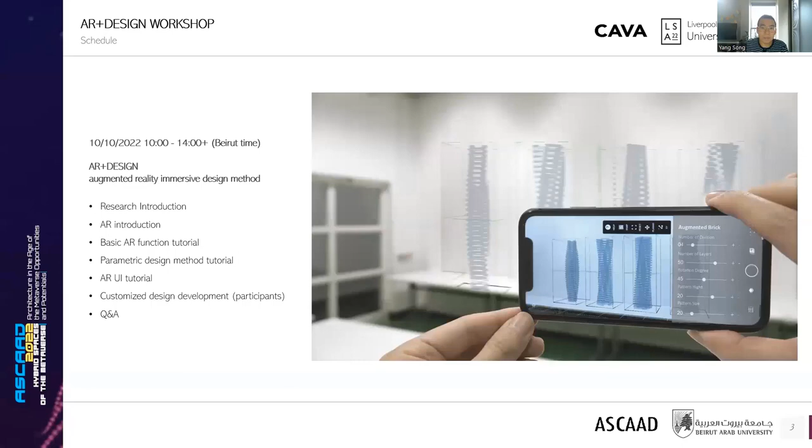So this online workshop aimed to introduce the knowledge of exploring immersive parametric design through the augmented reality environment. As the 3D to 4D design field, architectural design has been limited throughout its history by 2D or 3D representations.

Even though computer-aided architectural design and modeling software is widely used to produce digital 3D models, the conventional screen-based visualization methods for design and analysis are still restricted to how well the user understands the space on a computer screen, as the design is done outside of the building site.

Hence, there might be disparities between the design and final outcomes. Ideas like exploring immersive design in AR, as well as real-time modification experiments and interaction with built environments and the Metaverse, will therefore act as the central core of the research streams to reduce issues with the current design method.

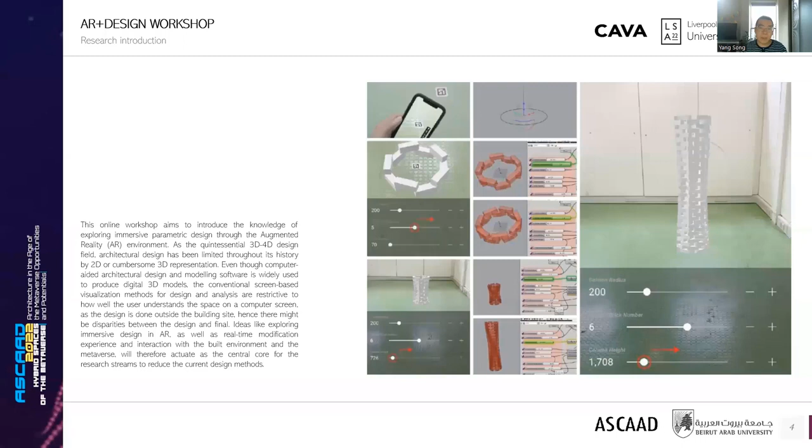So participants learned about the parametric design method of brick-based structure as the demonstration: basic AR modeling logic, AR on-site holographic preview, AR real-time interactive functions, and basic AR input methods.

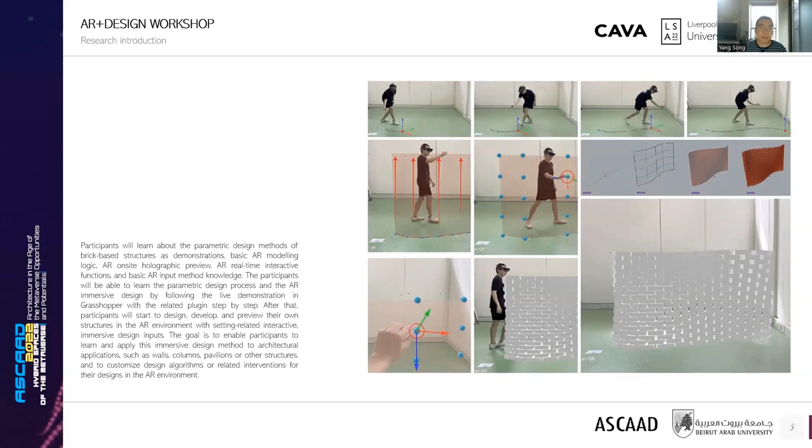Participants were able to learn the parametric design process and AR immersive design by following live demonstrations in Grasshopper with the related plugin setup, step by step. After that, participants design, develop, and preview their own structures in an AR environment, setting related interactive immersive design inputs. The goal is to enable participants to apply this immersive design method to architectural applications such as walls, columns, pavilions, or other structures, and customize the design algorithms in the AR environment.

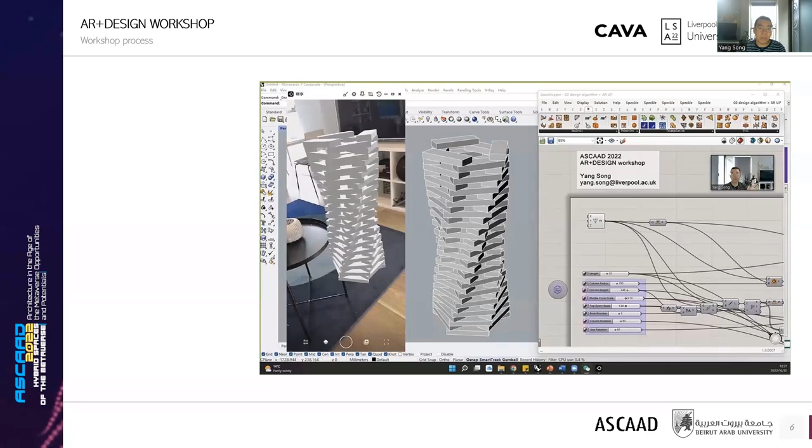There are 44 participants in total, and most of them are doing architectural design or interior design. Therefore, the results of the workshop are better because everyone has relatively relevant background knowledge.

The workshop outputs are submitted in the form of videos and pictures. For the video, participants use a mobile phone to access the demonstration of the AR immersive design through corresponding skills learned from our workshop, and preview the design structures in real time, overlaying the physical environment as AR holograms.

So here are some outcomes from our participants.

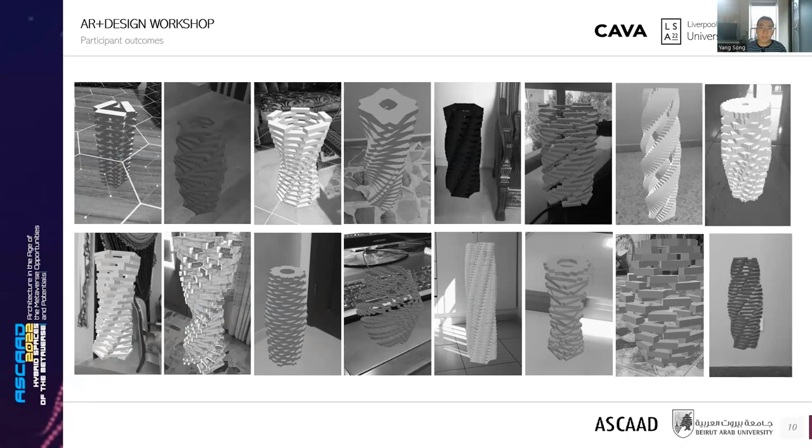Through this workshop, participants have learned the basic logic of AR design, as well as the basic interaction functions required for AR immersive design in Grasshopper. These ideas and attempts will help beginners enter the AR immersive design process faster and more effectively for further development. So that's all for my workshop outcome.

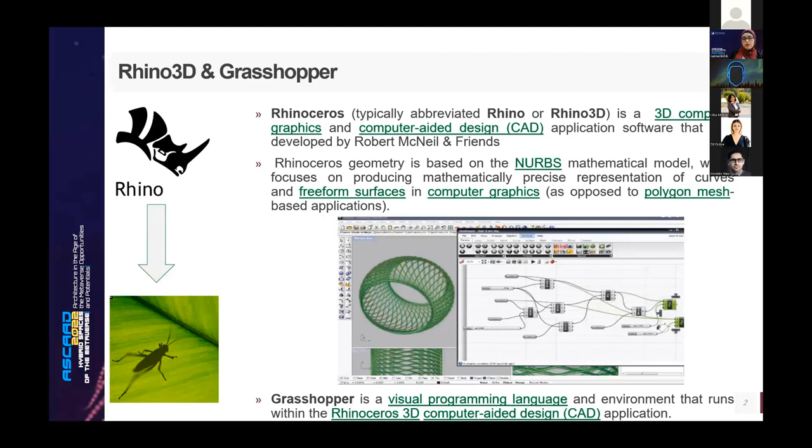Rhino, or Rhinoceros, is a 3D computer graphic, computer-aided design CAD application software. Rhinoceros works mainly on NURBS mathematical models, which focus on producing mathematically precise representations of curves and freeform surfaces. In Rhinoceros, we have a plugin called Grasshopper, which is a visual programming language and environment that runs within Rhinoceros 3D.

So in Rhino 3D, we have a plugin called Grasshopper. In Grasshopper, we have lots of plugins that could be introduced, such as environmental simulation plugins like Ladybug and Honeybee. But in this workshop, the focus was on 3 main plugins: Lunchbox, Firefly, and Weaverbird.

The main one was Firefly. Here is just an introduction for Lunchbox. The Lunchbox plugin works on putting panels, different examples of panels on surfaces, such as diamond panels, hexagon panels, random quads, triangulation, and other types of panels. It also works on trusses, creating structures and grid structures, hexagonal structures, and other types of structure. Weaverbird works just on meshes, such as cutting, thickening, moving, and splitting meshes into quads.

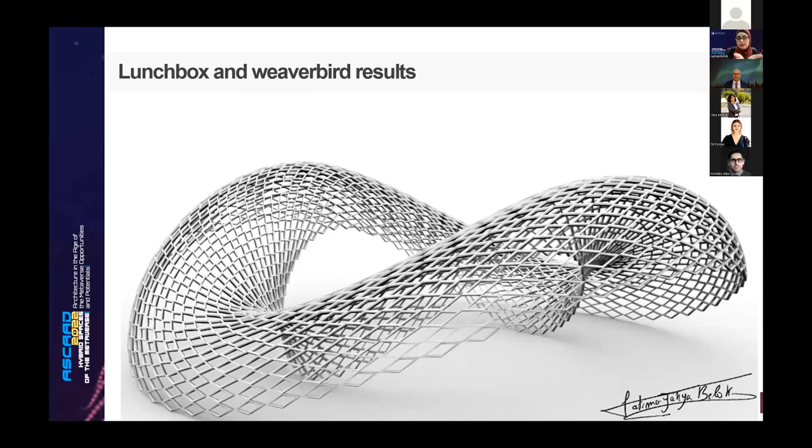The main plugin was Firefly, which is focused on introducing sound. These are some examples of Lunchbox and Weaverbird results. It is just based on surfaces and that could give me patterns. So these are some examples.

The main plugin was Firefly. Firefly focused on giving input. This input could be a sound, a music, or a voice. Then the process will work to give me an output. What could be this output? This output could be an interactive parametric pattern. So I introduce a sound that has different frequency, and this different frequency will give me different parametric patterns.

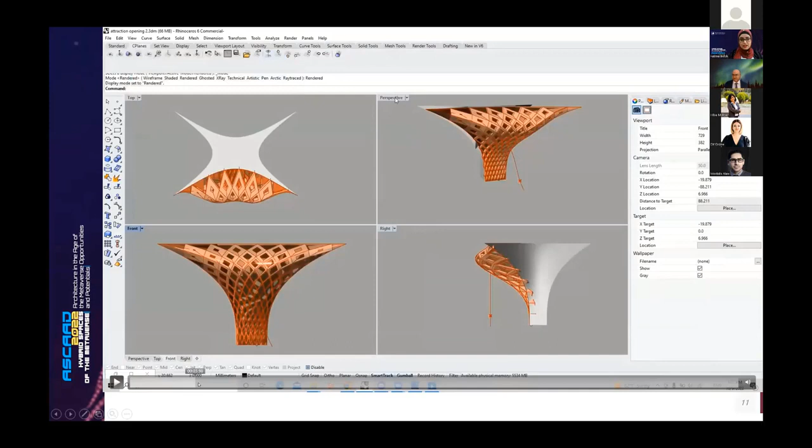For example, here, if we have this facade, this interactive facade, we can see the difference between the patterns. Each differentiation between the pattern is based on the sound. If the frequency is high or low, it differentiates the pattern. So based on the music or the sound, we could have different patterns. So this was one example.

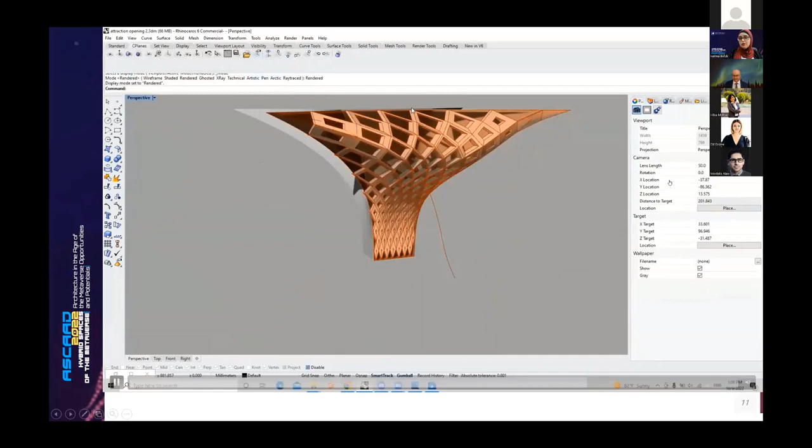The focus of this presentation is mainly on the work of the students. So let's see the examples of the student work. Each student has presented an A3 paper, putting all the designs and work done during the workshop. We have started by what?

We started, first of all, by putting a small sphere. Into this sphere, we introduced, for example, the sound of the student or any music they wanted, and we turned the frequency high and low. So the spheres start to move based on the z-axis, up and down. Then we added more spheres. For example, here we have 5 spheres that move up and down based on the sound itself.

After that, we moved to more complicated examples in Grasshopper. We worked a little bit on creating surfaces in Rhino, then transporting these surfaces into Grasshopper, using Lunchbox and Weaverbird to create a pattern on the facade.

So they created a pattern on the facade as shown here. For each surface we created 3 different patterns, because the students baked 3 different levels of thickness based on sound. They put a very low sound, a higher level of frequency, and an even higher one. So the thickness varies by the frequency of the voice — very thick, very thin, becoming more and more based on the sound.

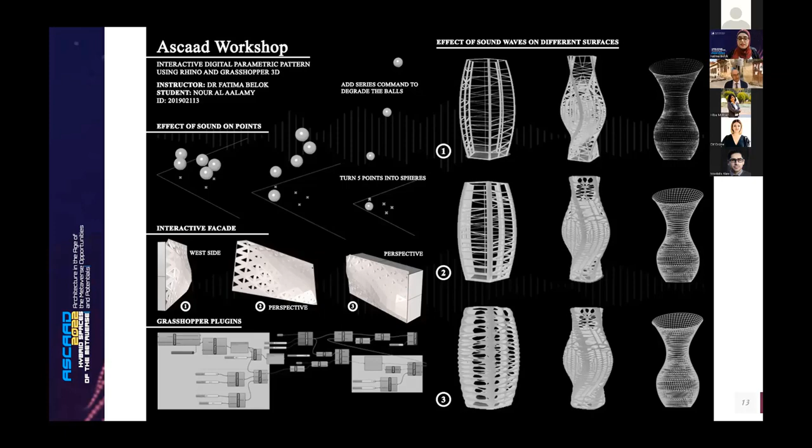We also tried different types of surfaces, for example on different towers based on rotation. We tried different components such as rotation, using series and different types of components, and also different types of patterns — here is the Grasshopper plugin. As you can see, they started with a very simple Grasshopper connection, then it got more and more complicated to understand the idea further.

Here is another example, for Ali Cheaib. He created a passage for passengers, with an octagon that has a certain rotation created in Grasshopper. Based on the sound effect on the surface, he also created different thickness for the surface.

He also worked on something called attraction. What does attraction mean? It's based on a point close to a curve. They selected a point, for example at the center of the surface, and when we get farther from this point, the surfaces become smaller or bigger. So they also worked on the attraction point.

Here also they worked on attraction, but based on the z-axis. So we can see, if these are buildings for example, these buildings become taller toward the end.

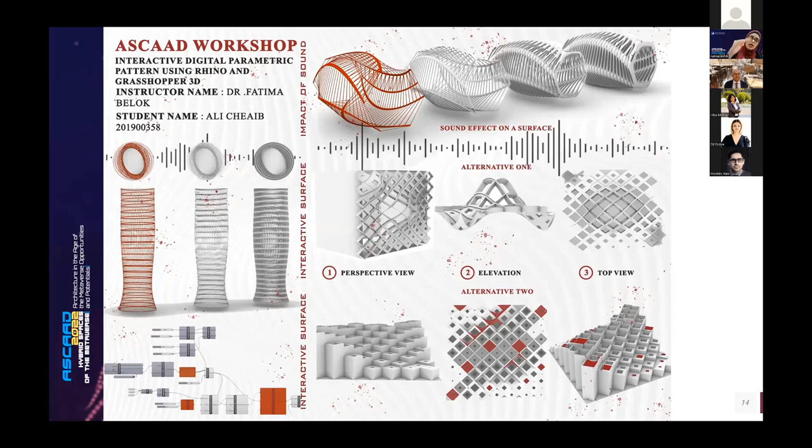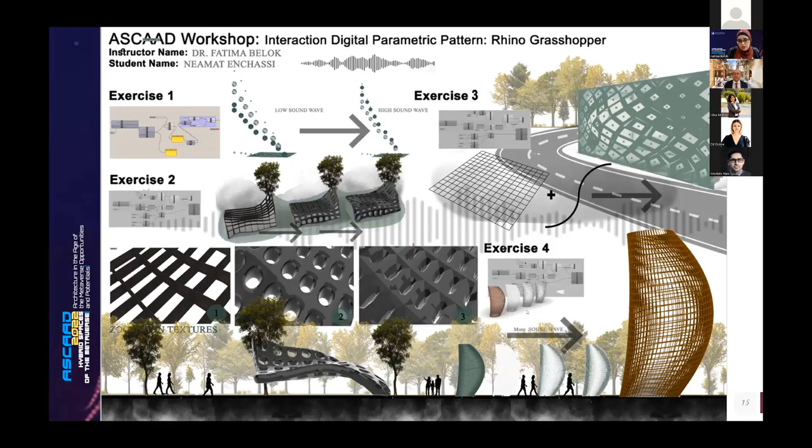We can see a different example here from Neamat, also on attraction, and she created a shading using Catmull-Clark in Weaverbird, which works on meshes. So she transformed the surface into a mesh. They had the knowledge of how to transform the surface to a mesh, then the mesh to Catmull-Clark to get a smooth pattern, and how to change this pattern's width.

Also here, another student's main focus in Firefly was on something called sound capture. We have a main component called sound capture that captures the sound, then we have a timer — we specify the time, for example 20 milliseconds or 10 seconds, to capture the sound. Then we have something called remap and constructing domain, based also on the frequency, whether it's very big or very small.

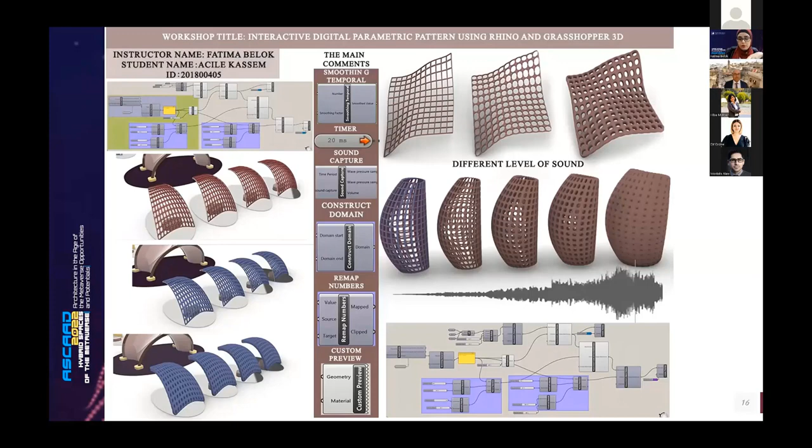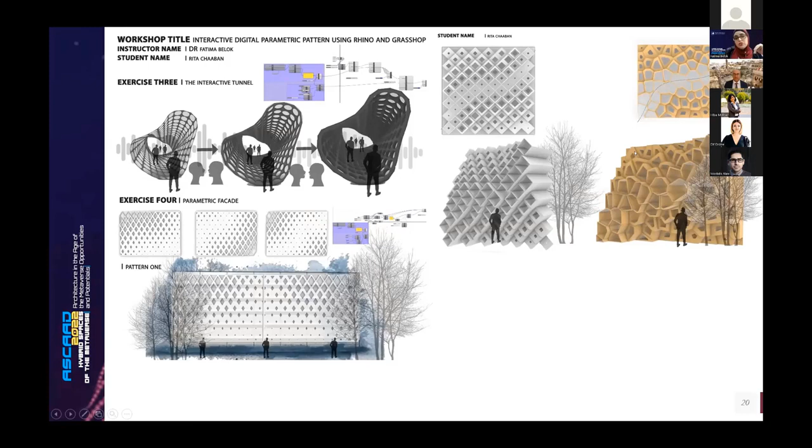Here is another example — he designed a building, and as we can see, each student has their own design. We focused on each student putting their identity into the design. For example, this student used the Voronoi pattern and attraction at the same time, and introduced a sound. Here is another example.

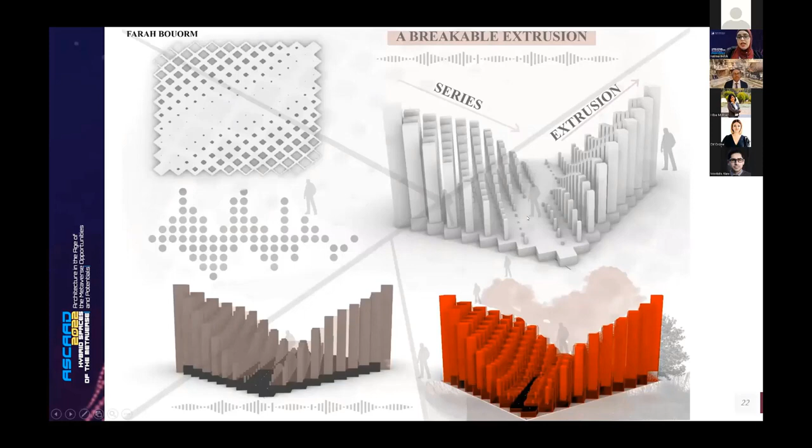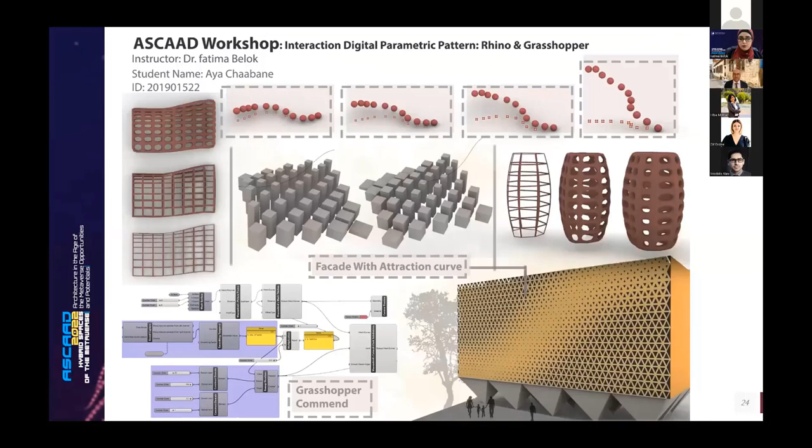This is also based on attraction, but using series and extrusion, and also sound, as we can see here with the sound interaction. Also here, the work was on Lunchbox using triangulation. In all of the posters, we can see they used 3 different tools: Lunchbox, Weaverbird, and Firefly for the sound. These are different examples.

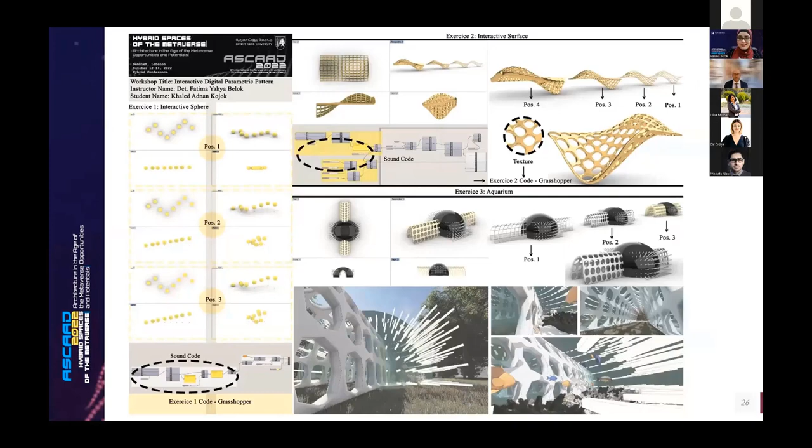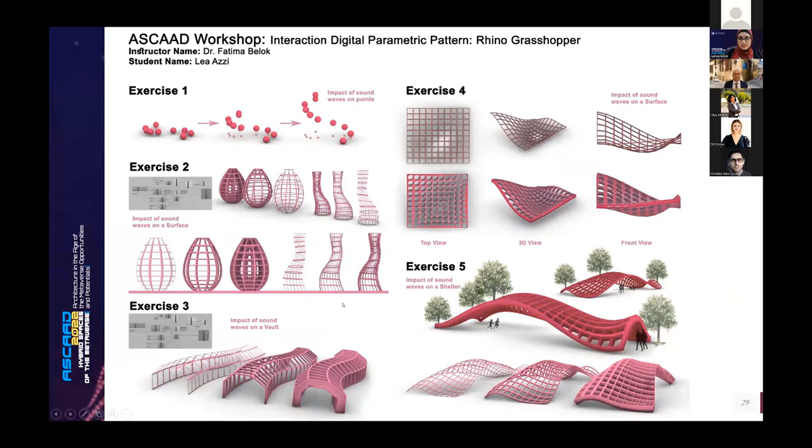Some students started to create their own projects. For example, here is a student who created an aquarium and put in concepts and ideas using dome. This was a design for a surface, and this was also a design for a dancing tower and the passage. Now we will see a small video of the movement of the facade and the pattern.

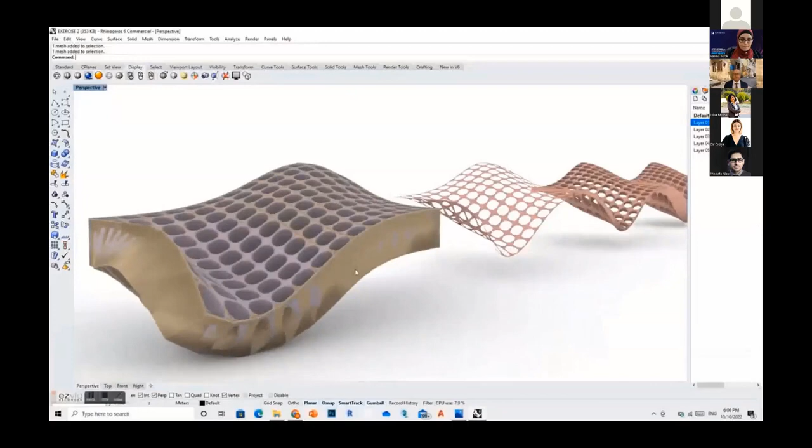I will show you the video now, it's just 1 minute. This is the attraction based on the sound.

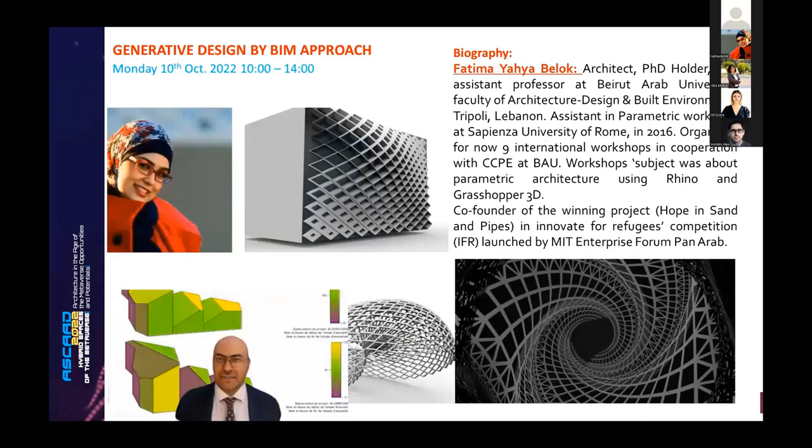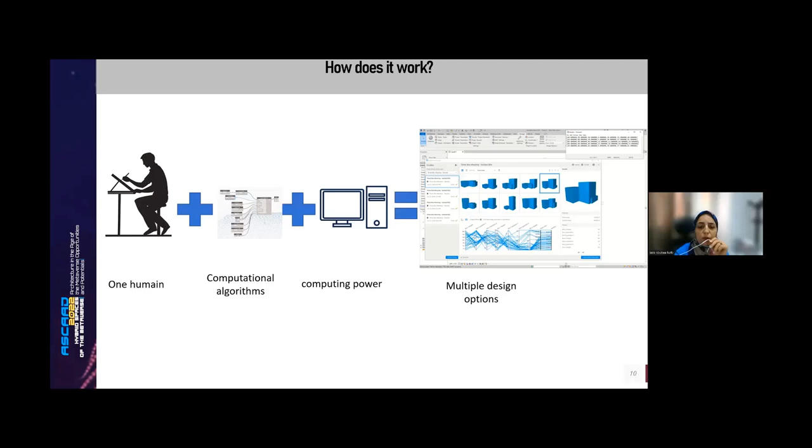With generative design, we can create thousands of options, and we can also optimize these options. Generative design is actually combining human, computational algorithm, and the cloud computing power. Combining these three, we can generate thousands of design options.

So you have to understand what you want to achieve and define your problems. This requires you to know how to use Dynamo and create Dynamo scripts. Also, you need to decide ways to measure success and think about how to review the results.

Using algorithms, you can decide what problem to solve, what goals must be achieved, and what factors are most important to solve these problems.

So how does it work? We generate multiple studies to find the best outcomes. There are 3 or 4 ways to do this using a generative design tool in Revit. The first is randomizing, where we keep running the study in multiple sessions over and over again, and we filter through the outputs at the end to find the best result.

You can also do what's called a cross product, where we generate every single possible outcome so that we can fully analyze the results. We don't tend to use the cross product because it's pretty slow and it produces a lot of results.

But if you are really needing to get the absolute best of the best, this is the way to do it. And we can also use a method called optimize, which generates multiple tests, and we're only going to see the most successful tests out of each batch of tests. This way you don't see the really bad results, but only the ones that are almost the best of the best, and then you find the best of the best of them, essentially.

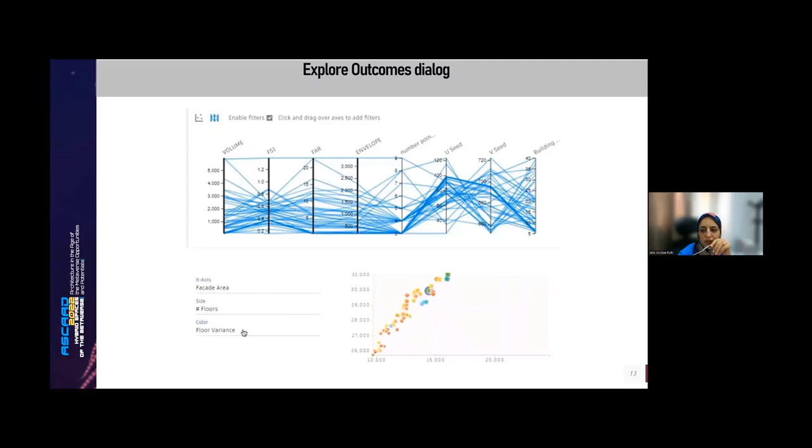Also you can explore like this. I prefer using this show/hide parallel coordinate to explore outcomes, dialogue, constraints display as a follow, in the list view of inputs and outcomes, so you can clearly identify which value changed for each outcome and which value stayed the same.

For the first day, we focused on Dynamo basics, so to create a model for a generative design study. We began by developing a common understanding on the mechanics of Dynamo, then moved on to build a set of graphs together that will include some basic geometric applications and Revit integration.

For the first application, the objective was to introduce parametric modeling via Dynamo, and the exercise consisted of setting two volumes by declaring variables, or inputs and outputs, and evaluators, which represent the objective of generative design. Revit Dynamo generative design were used to study the volumetry of buildings through an iterative process that generates outputs to satisfy certain constraints. The first step is to define inputs and variables depending on the ultimate goals, and the last step is to select the optimal solution.

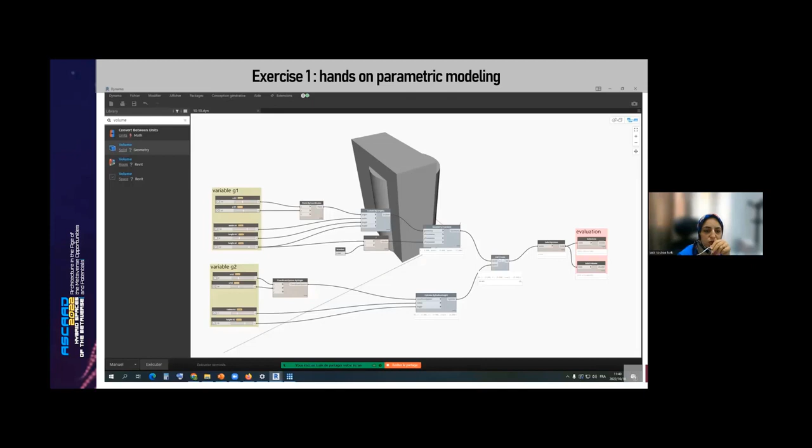On the second day, we focused on adding evaluators and generating design options, and we went over the fundamentals of optimization and how to frame a design problem in terms of goals and constraints in order to drive multi-objective optimization and evaluation in generative design. We explored the various ways our problem definition can affect the result of the optimization, and we exported the optimized solution to Revit for BIM study.

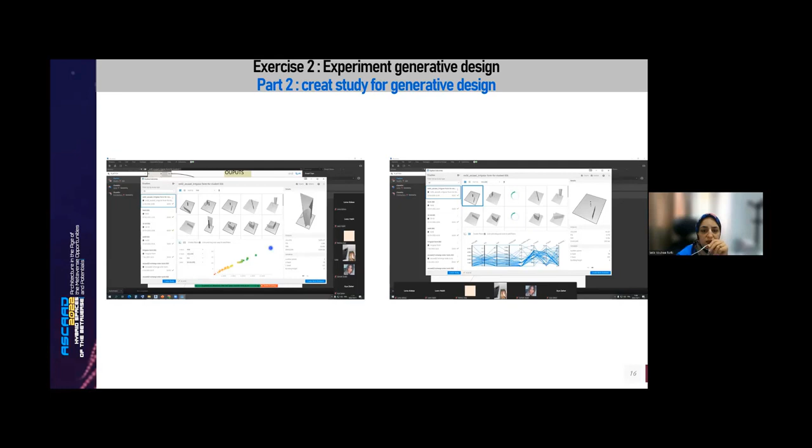So the second exercise was a slightly more advanced application. The first part consisted of parametric modeling; we gave participants a program code to complete with Dynamo by adding evaluators. The second part consisted of testing various methods of creating a study with generative design and visualizing results. The third part was to export the result into Revit to generate a solar study and explore a BIM study.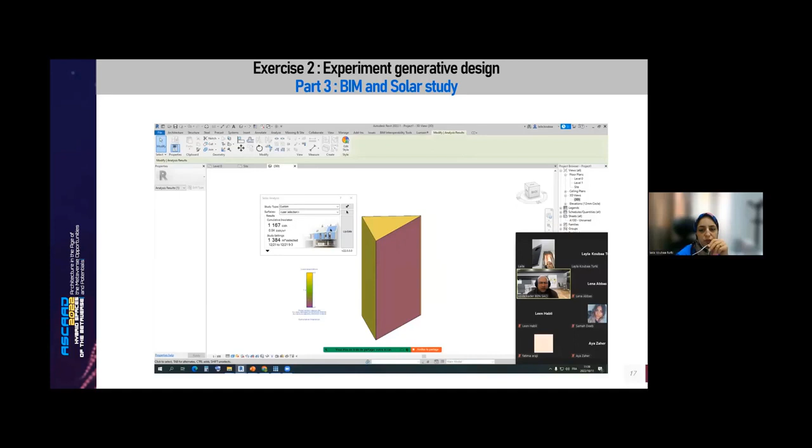Once the optimal solution has been determined, it was possible to import these results back into the Revit environment to complete the BIM modeling study. During this workshop, participants learned how to build geometry generators and evaluators using Dynamo, how to use these generators and evaluators to drive multi-objective optimization toward specific goals in generative design, and how to use generative design tools to evaluate the generated optimal solution and integrate some of these designs back to Revit for BIM study.

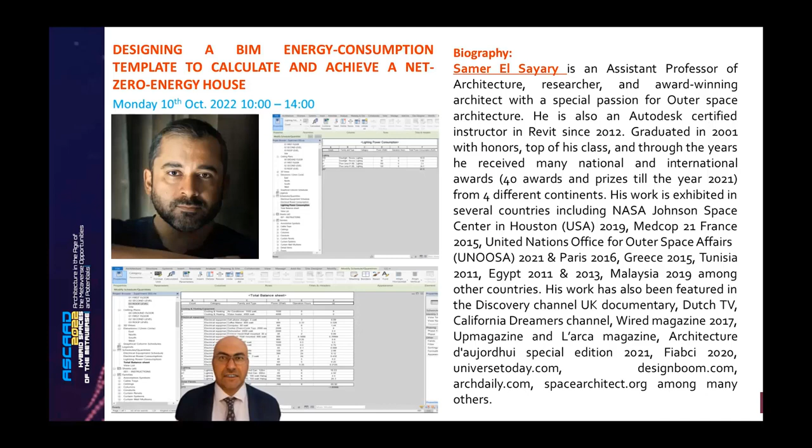So the workshop that we concluded last Monday was on zero energy houses. It is a pressing issue in today's modern and contemporary problems, the issue of energy.

So we combined zero energy knowledge, or how we can design a passive house, using Revit and BIM technologies. So the manifesto—I would like to introduce my manifesto first. It is digging deep into the rules of the universe, including our heritage and our legacy, applying those rules using cutting edge technologies, in our case with BIM, Revit, and some simulation software. And number three is delivering this system of knowledge to the future generations, as we have already done in this workshop.

These are a set of projects; it is a line of research that I have pursued since 2011, combined with cutting edge BIM technologies. So the line of research, the line of practice, and the awarded projects are all fused into just one fusion pot, which was introduced to the students last Monday.

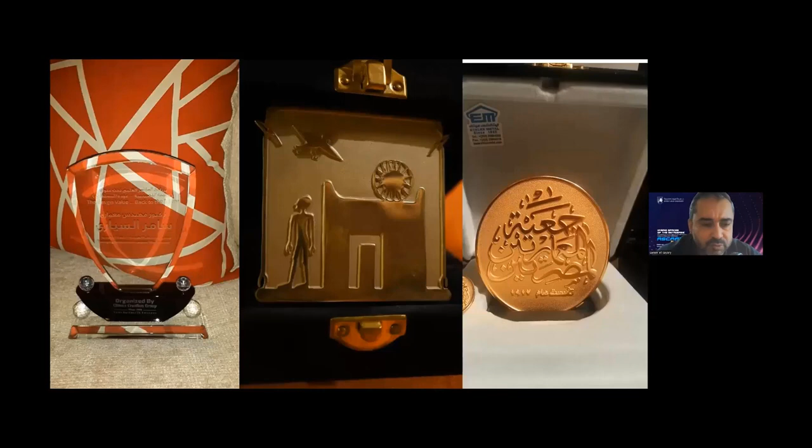This project was also introduced to the students and was awarded internationally in several venues. We first started with an introduction to passive houses and how we can understand the basic fundamental principles of designing a self-sufficient house in terms of energy, food and water production, as a complete sustainable approach.

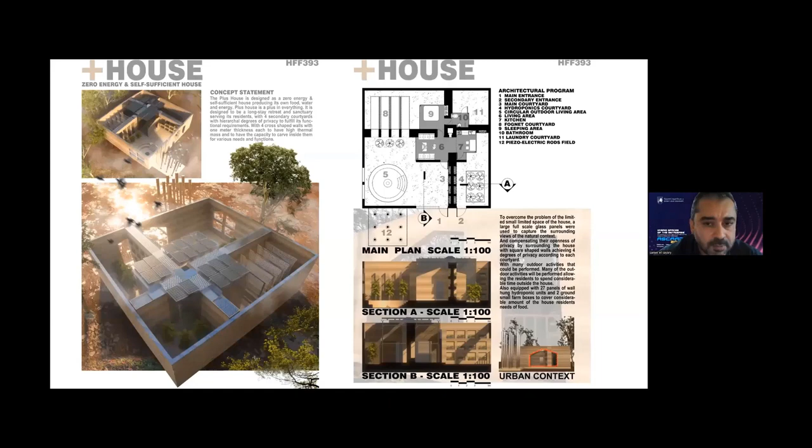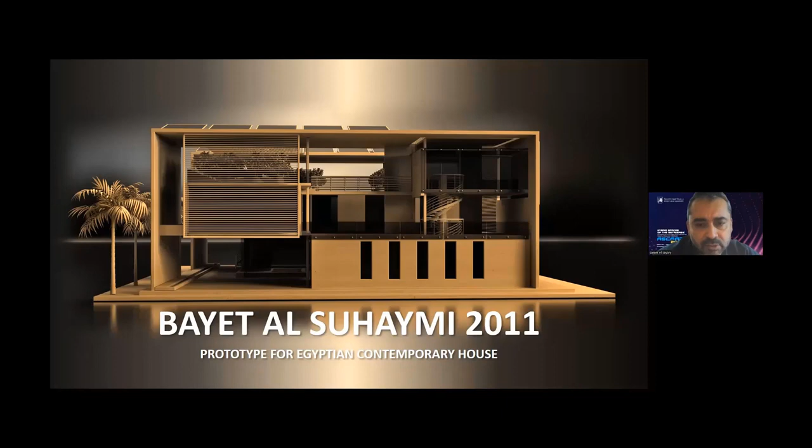So the first presentation was for the Plus House, and the second, which was the main one, was Bayet Al Suhaymi, an awarded project. The plans and the Revit file of this project were delivered and passed to the students to start experimenting and designing, taking it as a role model so they can take the lead in their own design projects.

Sorry. It's a little bit... okay. So the first...

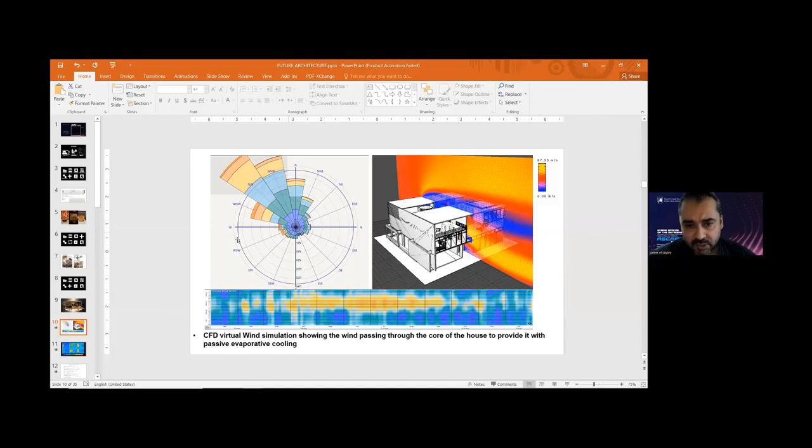The first slides show a simulation of the passive approach to designing a building without the need for any AC or heating system, using EPW files containing all the climatic data of Alexandria City from the US Department of Energy website. After running some simulations, including daylight simulations, we concluded that the design could use daylight at least 8 hours per day without any need for electrical lighting equipment.

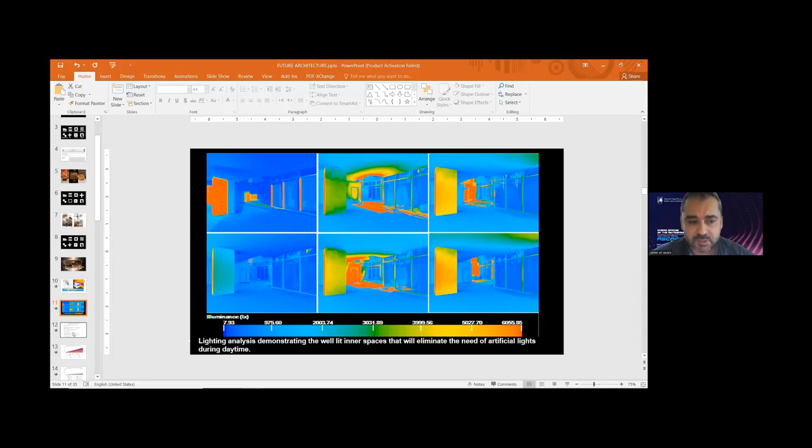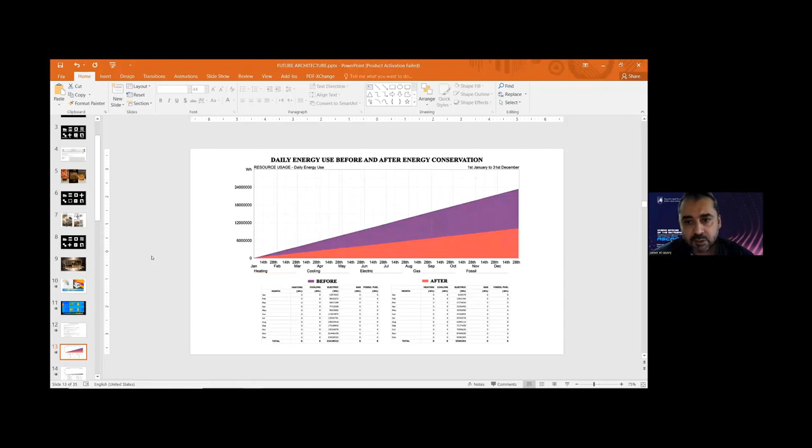Then a basic calculation method was used to compensate all the energy consumption using solar panels, reaching the level of decreasing the carbon footprint of a building.

Another example was applied in Arizona, which proves that zero energy houses could be applied anywhere depending on the environmental parameters and the specificity of the site.

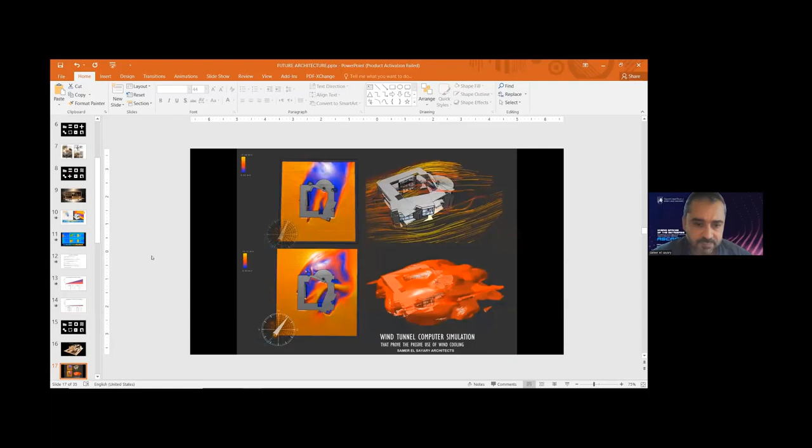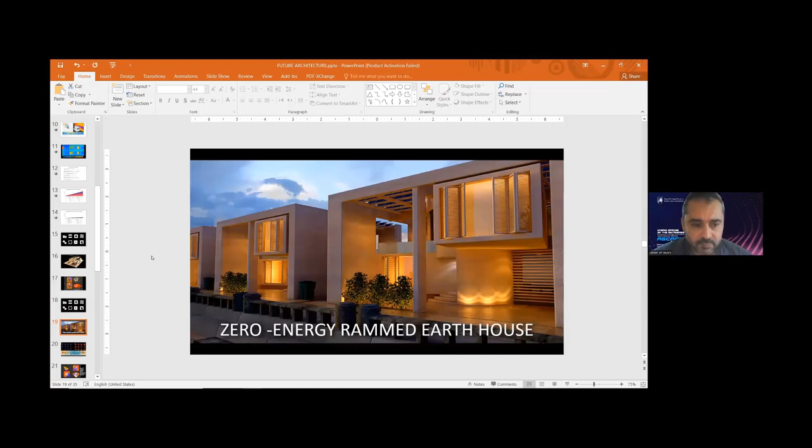Some simulations were also undergone for the Eco House in the Sinai Peninsula, which was sponsored by the Egyptian government in 2014 for the Bedouins of the area, and the same methodology was applied to reach a zero energy house.

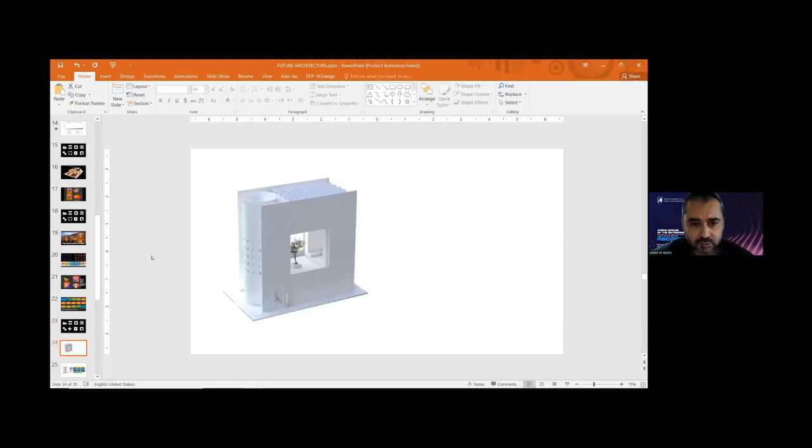After a series of projects to demonstrate and pave the way for a good understanding, and maybe lay the fundamental principles of having a zero energy house and a passive design.

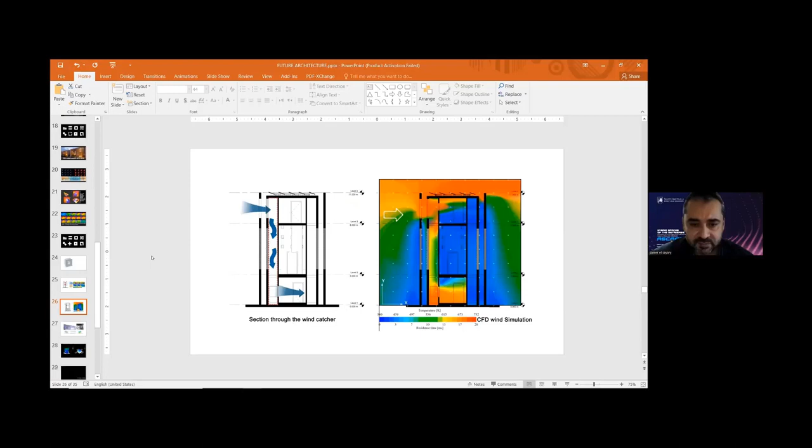The last thing was the project itself and its application. As I mentioned earlier, the template was passed on to the students alongside the projects and samples demonstrated in today's presentation, and the basic calculations were concluded.

There are two kinds of schedules: the electrical power consumption and the lighting power consumption, which were separated just for ease of calculation, including the total balance sheet.

The parameter here is having not 0, but minus 0 point something - not 0, not minus 1. So if the result was minus 0 point something, that was a successful zero energy house. That was the only parameter to achieve.

The compensation was done with several types and models of solar panels downloaded from the market and applied into the template. Not only did the students learn how to use the template, but also how to modify it, including new devices or modifying existing ones.

We are very sure that today's accelerating pace of technology carries every day a new invention, a new electrical device, maybe a modification, or a star-rated kind of device. So they should have the capability of modifying and editing the template to push the human story forward.